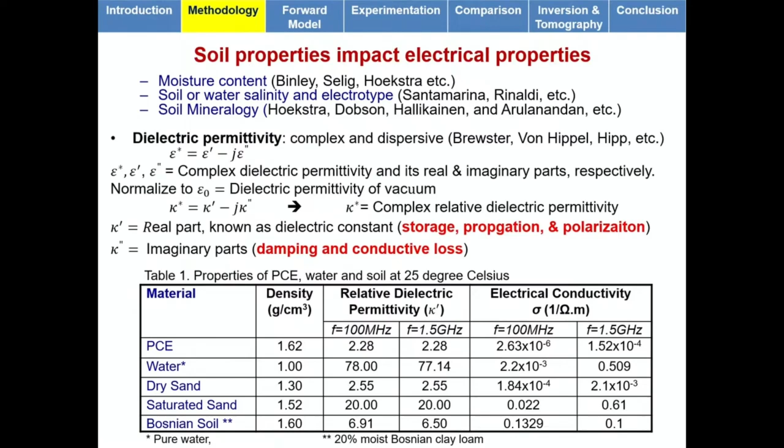And the properties change with frequency. They're not constant. And this variation with frequency is called dispersiveness. So these properties are dispersive, meaning they are a function of frequency. And the way things are done by geophysicists is this way. First, you need a forward model. I don't know if inversion and inverse problems is what you have seen, but forward model means what?

That means that if I have a Gaussian signal or sinusoidal signal or whatever, a known excitation signal source, and I send it to a known medium, if I have a good forward model, I could simulate how the wave would propagate, and I could compute and calculate what the received signal would be. That's called the forward model. So the unknown is the received signal.

And you could simulate this because we're dealing with waves in time domains. You could simulate them in frequency domains. And the input parameters would be the properties of the known medium for this simulation. And obviously, you could experimentally measure that received signal as well. Now, obviously, any model, any simulation, unless it's validated experimentally, is pretty useless and unreliable.

So you need to simulate this. If you're creating this forward model numerical simulation, you need to experimentally measure the received signal and see if they match or not for a known medium. If your simulation matches your experiments, now you've got a forward model that's validated.

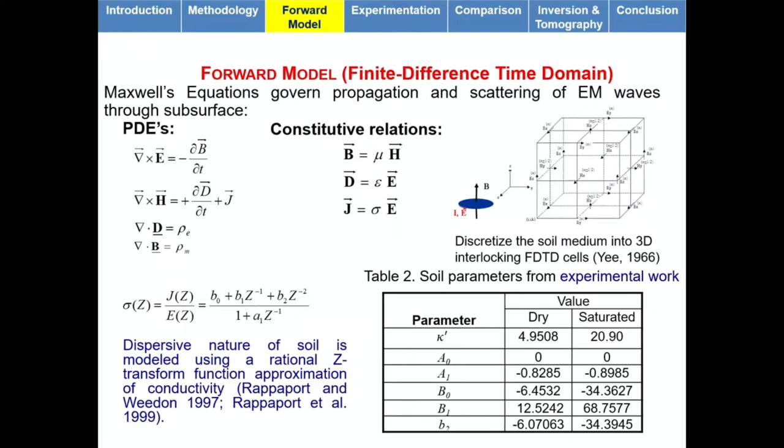The model was created from scratch in Fortran, actually. Surprisingly, electrical engineers love Fortran more than other languages. And then some of the input parameters that you could use, and we validated the experiment that I'll show you later on. This is an example of this.

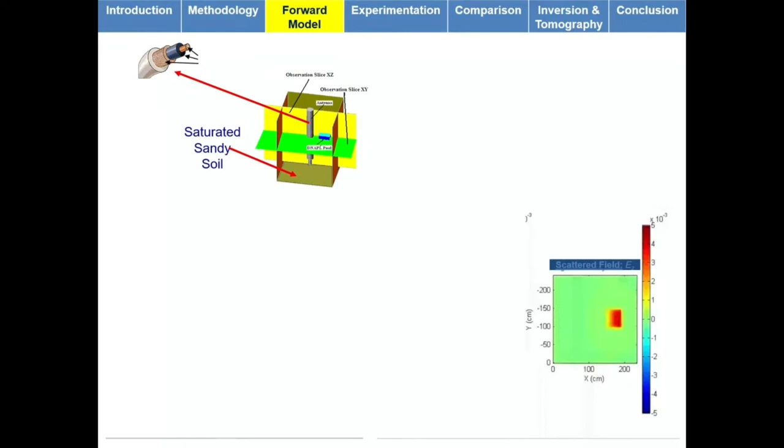If I have the total field, soil and the object, and I have the background or incident field, just the soil, I can mathematically subtract them, simple subtraction. And if I subtract them, we get something called the scattered field, which is the signature of the object. The scattered signature of the object feels like it's propagating from the object. That's the one we're looking for, the scattered field. And if we find that scattered field, we can figure out what we have in that medium.

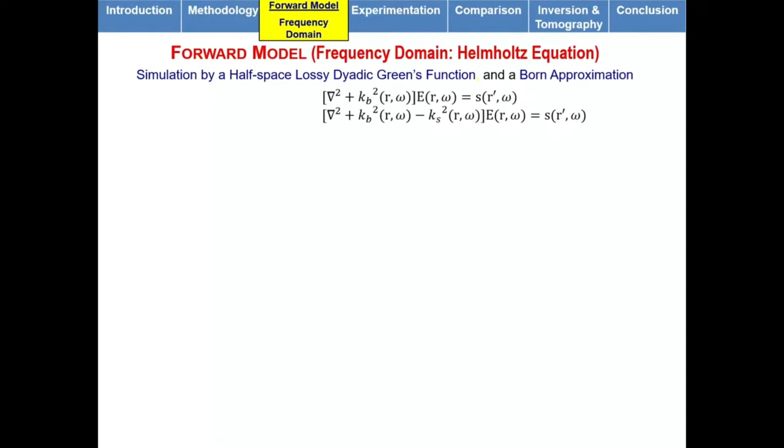This is in frequency domain, where you don't solve the whole suite of Maxwell's equations. You solve Helmholtz equations. And that K that you see is a function of the dielectric permittivity and the frequency. KB is for the background, KS is for the scattered case, and I don't want to get into the details. We use the Green's function with the first or second order Born approximation, solve this, and figure out what the scattered field would look like in frequency domain. Frequency domain looks like a snapshot in time. There is no time propagation, it's just one snapshot. So this is a forward model.

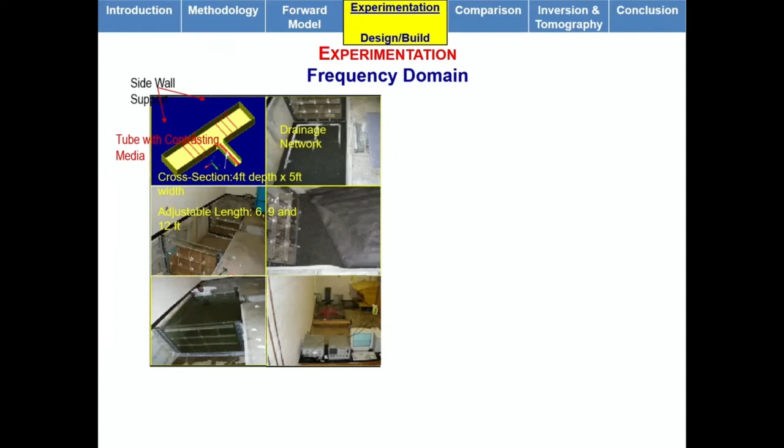And so you have either S21, which is transmission from antenna 1 to antenna 2, or S11, which is reflection at antenna 1. So those are the type of measurements we run, but they're in frequency domain, not in time domain. So there are ways to convert these in time. And the antenna is one that was developed years ago and solves a lot of problems that other monopole antennas have. Can't get into the details of that.

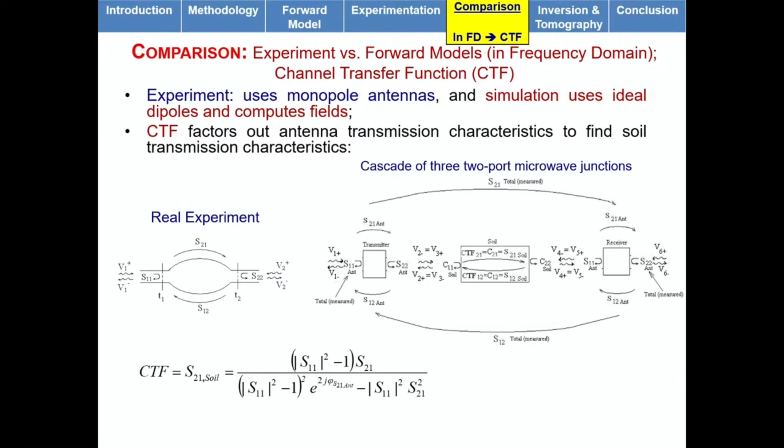If you have interest in undisturbed measurement, what we did is we assumed this was a cascade of two-port junctions. The transmitter antenna, the receiver antenna, and the soil were simulated separately, and we mathematically figured out what the S21 of the soil alone was. We call it the channel transfer function. This was published years ago, but it's a novel way that solves that holy grail. Now we get a measurement that's independent of the sensor. And this method is a black box approach that could be applied to any other measurement. All engineering boils down to physics, physics boils down to mathematics, so if you know mathematics, you know everything. This is a mathematical approach that doesn't have to be limited to this problem.

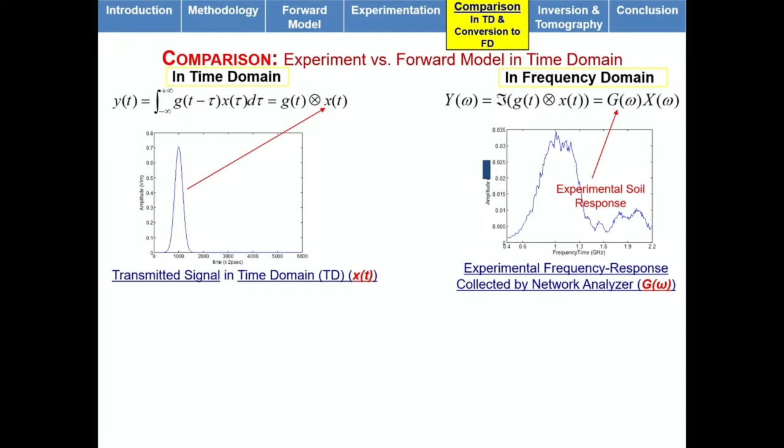In other words, I sent the signal at 1,000, I believe this is picoseconds, and I figured out that the signal would have been received at around 6,000 picoseconds without even running any time domain measurements. Through Fourier, FFT, and IFFT, I can basically bypass the time domain measurement, which is very difficult, and get the time domain measurement mathematically. So all of these things are what geophysicists do day in and day out, I mean, some of that.

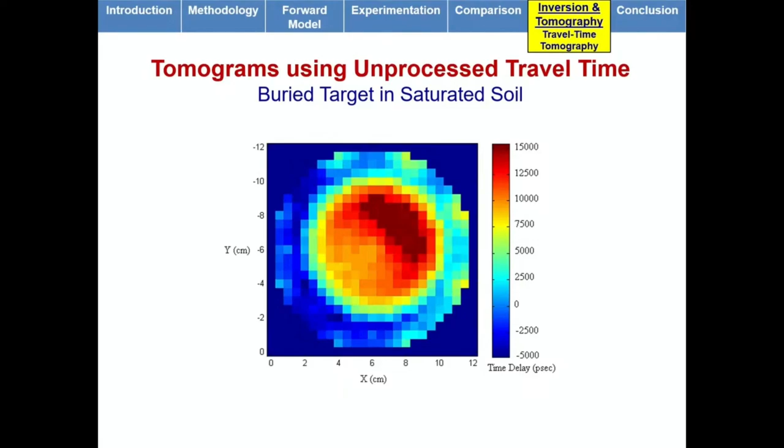And then you could build an image like a tomogram of where the object is, which is that red portion, where the contamination was. Using cross-borehole radar, that could be shown. This is what geophysicists do. They know the electromagnetic waves are impacted by soil, so they look at that scattering and figure out what's in there. Now, what is it that we did?

Years ago, I think it was 2008, I thought that, hey, if electromagnetic waves are scattered by the medium, if I crank up the power a little bit, the medium might be scattered by the electromagnetic waves as well. So let's see what happens. Something could happen to the medium as well. So we tried to crank up the power a little and see what happens. So this is the impact of electromagnetic waves on the medium.

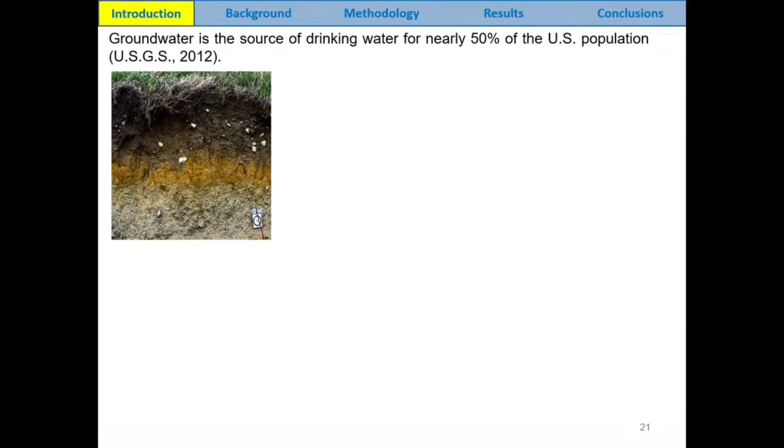And think about remediation. The first example is remediation. This is not the older work. The liquefaction is the newer work ongoing, so I cannot reveal all of the results, but this I can. So a lot of groundwater in the United States is contaminated with different things, especially DNAPL or PFAS and a lot of other things. Marina knows what I'm talking about if you're into geoenvironmental engineering.

And to remediate those, to clean up, there are different ways. Ex situ methods, like you dig the soil, send it to a plant, you burn it, you clean it, wash it. Or in situ methods, like air sparging. I'll show you an air sparging method later on. You try to inject air or some chemicals in there and clean it up. People use electric, and these ex situ methods are costly. To dig the soil out and clean it up, it's very costly.

And there's also natural remediation, like volatilization. Your contaminants have a component that quickly evaporates if it's exposed to air. Those are called volatile organic compounds. And they vaporize if they're exposed to air. And there are microbes in soil that can biodegrade, can break down your contaminants as well. That's called biodegradation. These are all slow. If we could stimulate them, we could clean up the soil, not in 1,000 years or 100 years, but in a year or so.

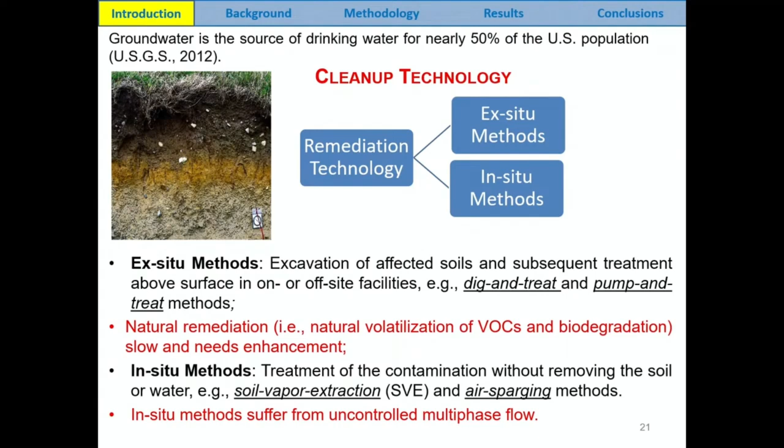And air sparging is one method. People pump air into the soil and basically vaporize the contaminants, the VOC part, and then the rest, they can inject microbes in there or food for microbes and hope that the microbes would break down contaminants. That's called bioremediation. We'll talk about air sparging later on. A lot of these methods are used, but to stimulate them, people use DC current, direct current. And the whole field of electrokinetics comes from that.

And people have tried to use AC currents, alternating currents, like the one we have in these outlets, for remediation as well. The problem with AC and DC is they generate a lot of heat. The other problem with DC is it alters the pH of the medium. Both are bad for the very microbes you're trying to stimulate for biodegradation. So we thought this is an issue. Let's come up with a better way. With electric current, you just have the resistivity of the medium. You put a voltage, you get a current, no more control, period.

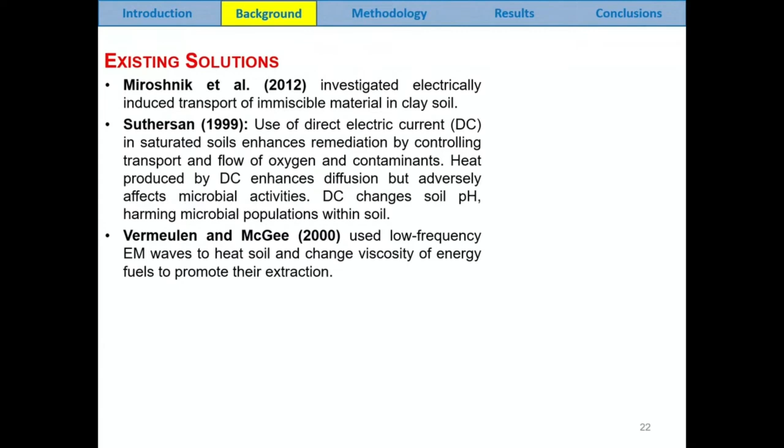What time did we start?

When we have an electric field that's constant, meaning positive here, negative there, anything that is charged would orient itself. If it's a negative ion, it would go to the positive pole, and the positive would go to the negative. If you have a molecule that's a dipole, like water, it would tilt, and the negative would face one way and positive would face the other way. Because if you remember, some materials are charged, like ions, either positive or negative. Some molecules are neutral. They're uncharged, there's no charge.

But even among the neutral materials, you have molecules like methane, CH4, where the positives and negatives are canceling each other, but they're uniformly distributed around. So they're not only neutral, they're non-polar. They don't have a pole.

But if you look at the water molecule, it's neutral: 2 positive hydrogens and oxygen with 2 negatives. It's neutral, but the positives are on one end, negatives are on the other end, which means it's a dipole. It has 2 poles. If I put water in an electric field, it would orient itself.

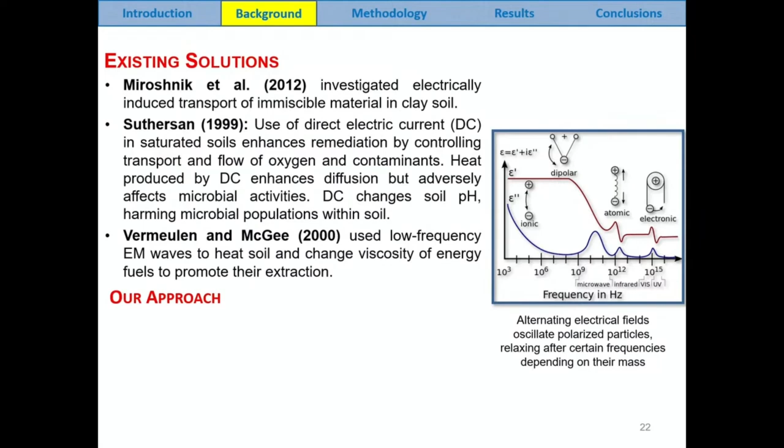And then you go higher and water is not absorbing energy anymore. You go even higher, atoms will stop oscillating. You go even higher, electrons will stop oscillating. You go to X-ray, nothing oscillates, nothing absorbs energy, which is why X-ray goes through your body, but microwave or visible light doesn't. So that's why you take an X-ray.

So there are different relaxation mechanisms. And if I pick the right frequency, I can decide what I want to oscillate and what I don't, and how much energy would be absorbed. And I could control things so that things don't heat up, but I can move them. And when I thought of this, I thought, okay, the least I could do is stimulate diffusion of material. If I have a chemical that's trapped, I can move it. I can help the same natural process speed up.

That's what I hope. Then we realized that we opened a can of worms, but we found so many other things that happen in there, and I'll show you a couple of them. So all these experiments were done in the lab, so we had to do it within a cavity, meaning we had to trap everything within a box, so it wouldn't impact your body.

There's no danger from electromagnetic waves at these frequencies anyways. At low frequency, somebody says your cell phone gives you cancer, but they don't know what they're talking about. So yes, your cell phone can heat up your brain, but the battery cooks it more than the waves do anyways. Not at these frequencies and powers.

Electromagnetic waves are non-ionizing waves at low frequencies and these powers. Hence, there's no danger of ionization or cancer and so on. Yes, with X-ray and gamma rays, we're talking about cancer because of that high frequency. Electrons are released and photons are released and so on.

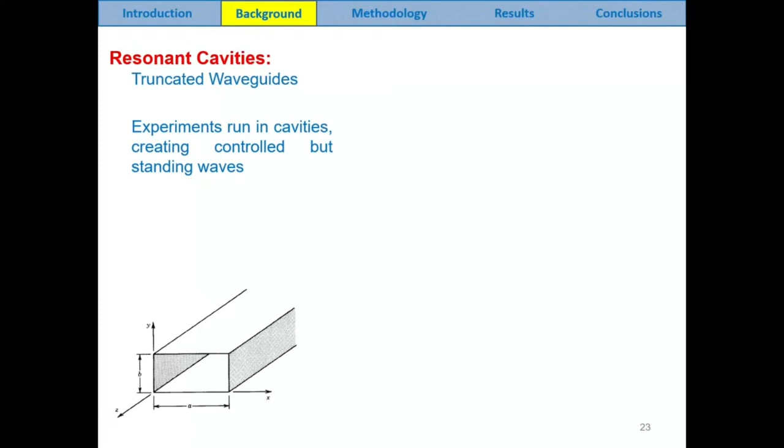But we did it within a cavity, and in cavities, the only difference is now you don't have traveling wave patterns. You have standing wave patterns. And you could create different wave patterns depending on the frequency and the wavelength of that sinusoid with respect to the size of that box. You could create first mode, second mode, third mode. Think of it as modes of vibration of a building.

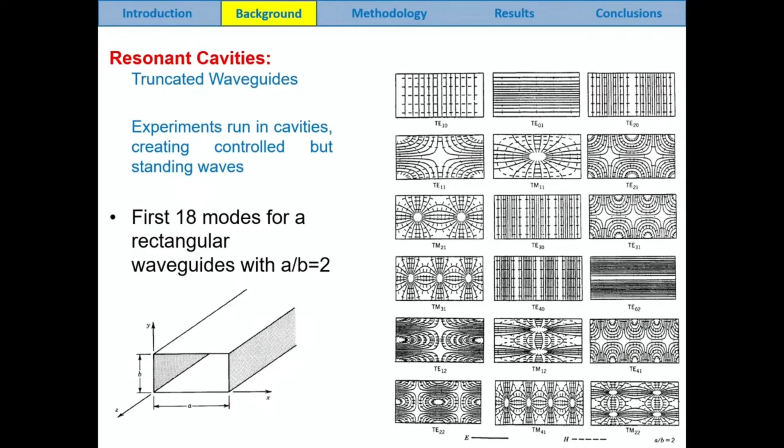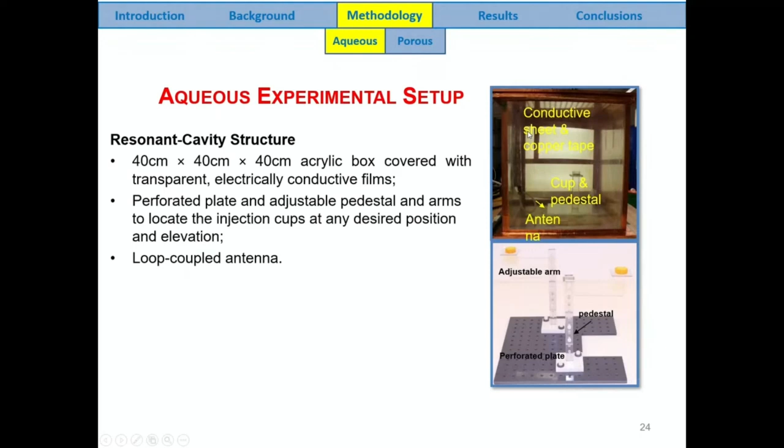So we created this box. It's made of plexiglass, but the faces are covered with a transparent, electrically conductive metal film that you see through. So this is a cavity, and up left there's a little loop antenna that magnetically excites the medium. And we thought, okay, we put a little cup at the center, right here, and we will inject chemicals in there that simulate DNAPL to see what happens. We hoped that it would diffuse faster.

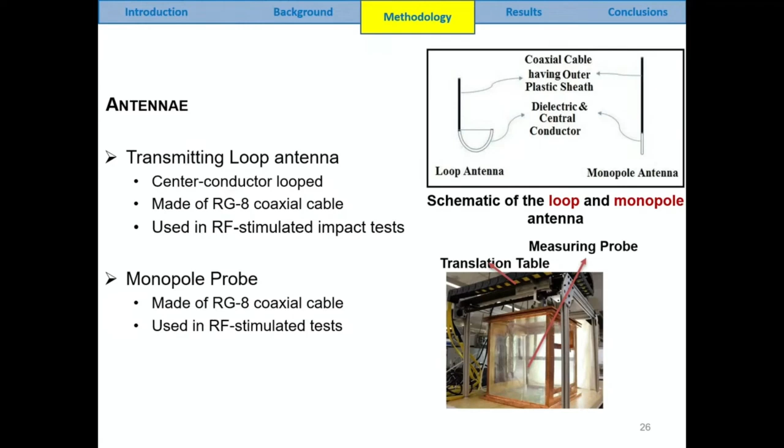And this is the loop antenna we have, to excite the medium on the left, and the monopole antenna is just to probe the medium and see what the field looks like. So later on, we figured out the process, which was, by the way, coined dielectrophoresis.

And that's the formula. As long as there's a difference between epsilon as the background, epsilon m, and epsilon as the object, particle p, there's a force applied. And that force is proportional to the gradient of E.

Is the electric field higher here or lower here? In other words, when things start oscillating, the stuff that would oscillate, like water, would oscillate. The stuff that doesn't oscillate gets out of the way. That's why you create a flow, a multi-phase flow. That water would go somewhere, and the contaminant that's neutral, non-polar, like methane in that case, or DNAPL, would go elsewhere. So we figured out that this was the mechanism.

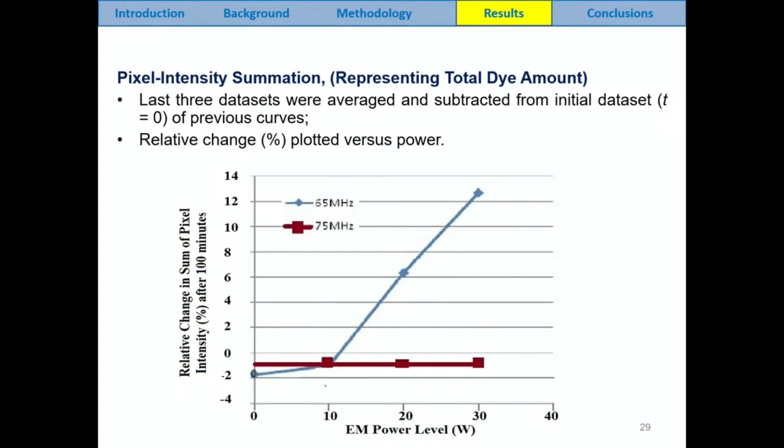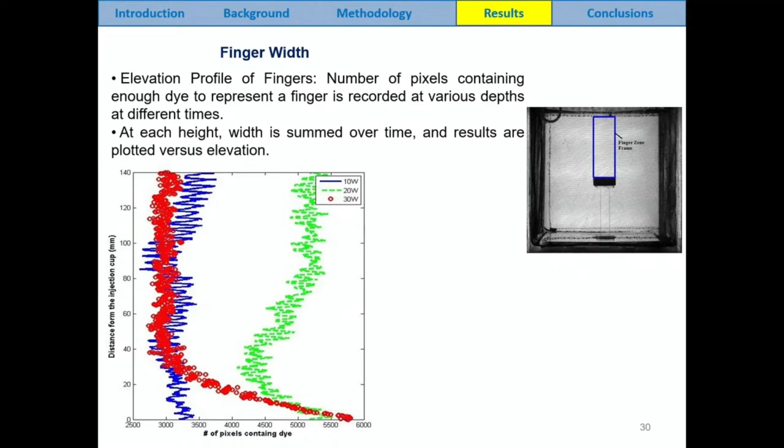We also looked at the width of the finger that comes out of that. We talked today with Achilles about the finger formation - we could control finger formation, which is a good thing in manufacturing, a horrible thing in oil exploration, or MICP, or probably colloidal silica type remediation. When you try to inject things, sometimes you like fingering, sometimes you don't. So we could control it using electromagnetic waves.

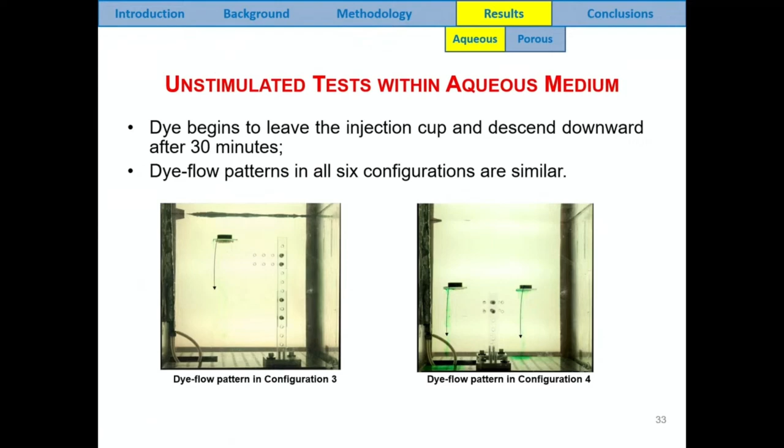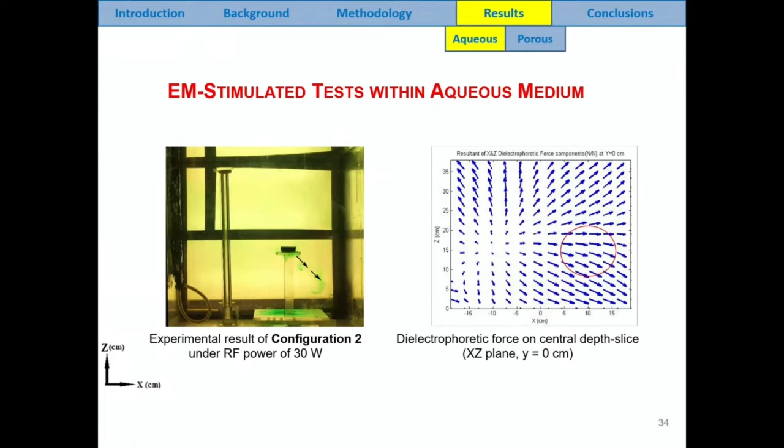We put the cup in different locations, and you see these two cups. When there's no electromagnetic waves, the contaminant sinks down. If there's an electromagnetic wave here, it will move around. Those arrows are the force field. Wherever the force is, the dye goes. In two other cups, the dye goes up. In fact, we can change the frequency and make the dye dance in there and change direction wherever we want. This was proven in the lab. This works, not an issue.

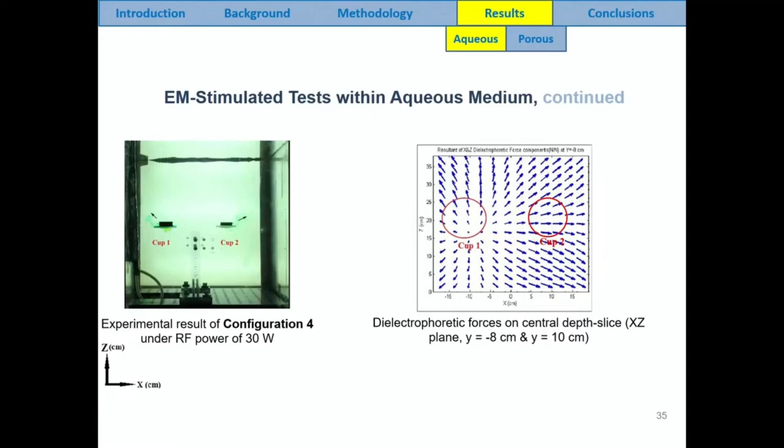Now this is another one. Let me quickly go through that, and hopefully I get to the stuff that you like.

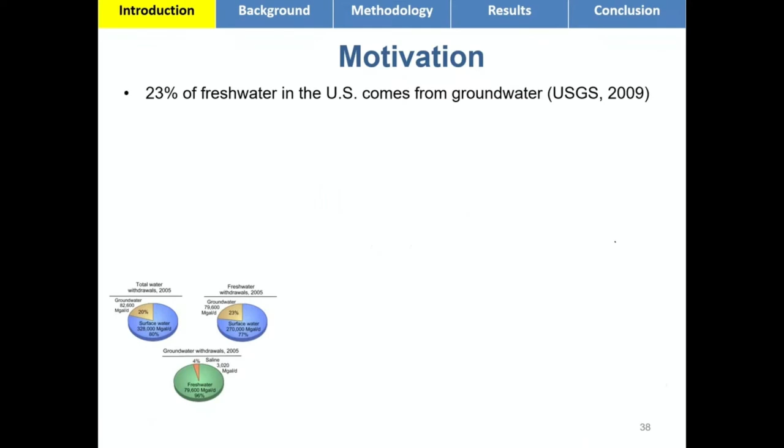This is an air sparging problem issue. As I told you, when you have contaminated soil with VOCs and groundwater, people inject air into the soil hoping that the contaminants would clean up and evaporate.

If I give you an analogy: if you have an empty cup and put a straw in and blow, it's easy. But if I have water and blow in there, I can't push the air in - I have to push and push. If the pressure is too high, bubbles form and come to the surface. I have no control. The same thing happens in soil.

Channels form, and cleanup happens only around channels. We call them mass transfer zones. Nowhere else. What does the industry do?

They realize this is an issue. They advertised air sparging, but it wasn't working. So what they do is run it for a month, shut it off for 6 months, hope they come back, turn it on again, and channels form elsewhere. It helps a little, but not a lot, because you've already moved soil particles and created preferential paths.

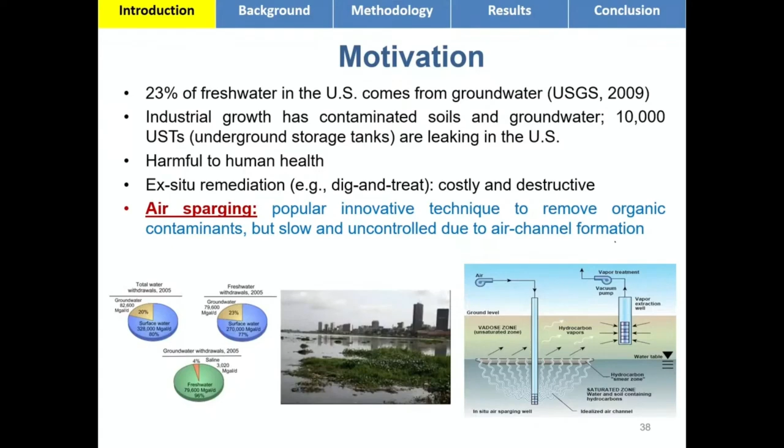So we thought: okay, we can move a contaminant that's neutral and nonpolar, maybe we can move air too. Why not? So we ran an experiment very similar to that - I don't want to get into the details - but first we tried to figure out how air sparging works.

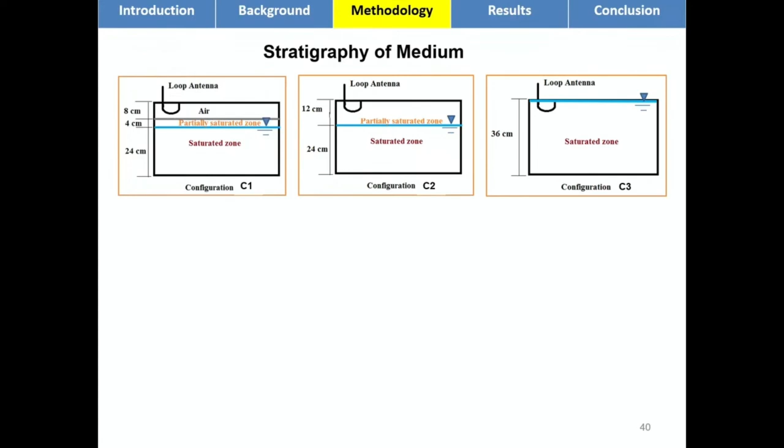We created several setups: fully saturated, halfway saturated, with a little bit of dry soil on top, and with no dry soil on top. These are configurations 1, 2, and 3 that we created. For these configurations we ran a series of experiments. This is again another cavity, with the loop antenna on the left.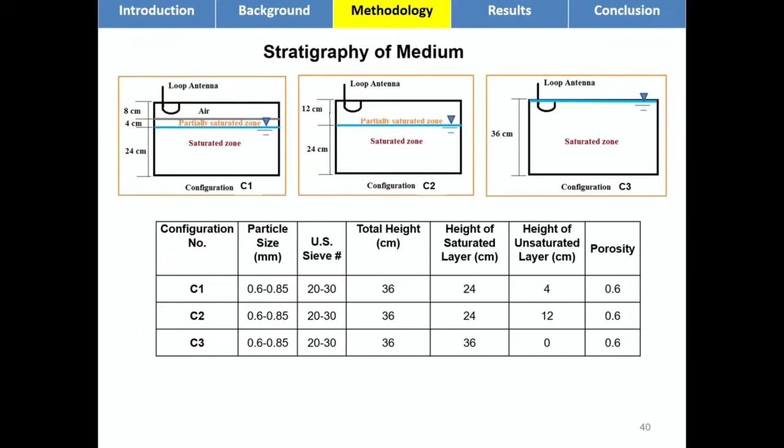The air pump is at the center - we pump air at the center. First we try to see what air pressure does. One thing we realized is when you pump the air in there... let me show you an image that hopefully clarifies things. No, I don't have that image yet.

So when you pump the air in there, it's going up, going outward as there's more of it. If you look at the top view, there's a circle - the radius of that circle is called the radius of influence. We thought we might be able to control this radius of influence. This is the zone of influence, and the radius is the radius of influence.

First we wanted to see what air does, what the industry does, because the industry just pumped it and didn't know exactly what happened. So we started the experiment, cranked up the pressure to a certain point, and then air sparging starts. That pressure I'll call the initiation pressure.

We wanted to see if that initiation pressure, high or low, would have an impact. After air sparging was running for a while, we would increase the pressure more and more to see if further pressure increase would change the zone of influence. Short story: we realized the initial pressure decides what the zone of influence is, how large it is. After the zones are formed, you could increase the pressure forever and not change it much, unless you move all the soil around with your pressure.

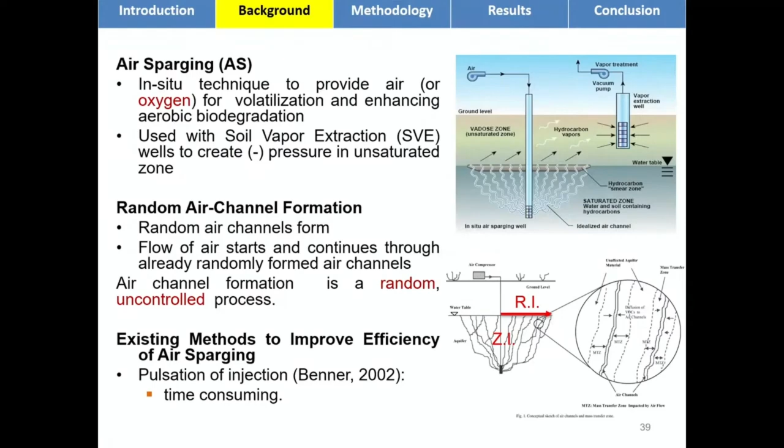So these are the experiments, testing the impact of initial pressure, and then we ran testing to study the impact of further increase in pressure. We did the same thing with electromagnetic waves. We applied electromagnetic waves before the system was turned on to see how it impacts it.

And we applied more electromagnetic waves after the air sparging was running to see if there's any impact. To tell you the truth, the ones on the left have an impact. The ones on the right, waves, pressure, doesn't matter. Channels are formed, channels are formed. Good luck, you can't change them.

In this figure, I have the radius of influence on the vertical axis, and the initial injection pressure on the horizontal axis. Configurations 1 and 2 are like that. The higher the initial injection pressure, the larger the radius of influence, but obviously at some point it fluctuates.

Configuration 2, which has some dry soil on top compared to configuration 1, confines the soil, so the zone expands. That's why the blue line stays above the red line.

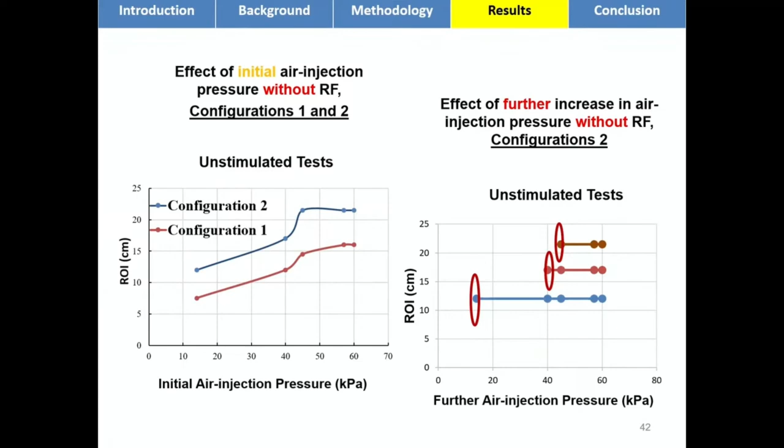Further increase in the pressure on the horizontal axis is the further pressure increase after the system started. The vertical axis is ROI — no change. No further increase in pressure increases the ROI.

Now we applied the same thing with electromagnetic waves, and these are the forward models, these are the force fields. Look at this, this is the top view of the field. And look at what happens later on in the image.

The image on the left is no electromagnetic wave. You see the top is the pipe, you get the air, and the circle — you have a pretty uniform shape. That's half of the zone of influence, that's the radius of influence.

And on the right, I applied electromagnetic waves. Look at the shape of this zone of influence — it's deformed. Why did it deform? For that electric field, this is the dielectrophoretic force field. Look at the arrows — they push down and then stretch out.

Basically, that circle should turn into lips — a pair of lips like human lips. And you see that here.

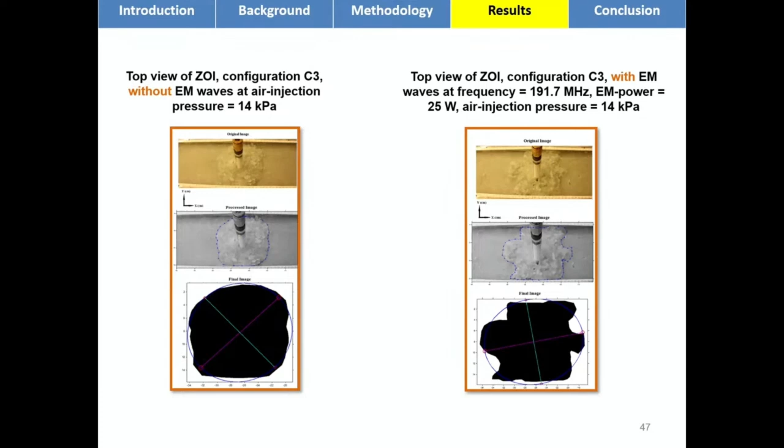So we could design a field that changes the shape of the zone of influence, whatever way we want. Then we said, let's try different initial electromagnetic power to see if we could expand this zone of influence, like air did. And this is it: more initial electromagnetic field power before the system is turned on creates a larger zone of influence.

Then we said, hey, two different things happen — in 10 minutes two different things happen, and we don't know whether other things are happening. So we said let's look at the hydraulic conductivity. If we're impacting the contaminant, if we're impacting the air, we might be impacting the water. We thought dielectrophoretic forces are working on the water too, so they should move in the opposite direction, and we thought let's measure the hydraulic conductivity and see what happens.

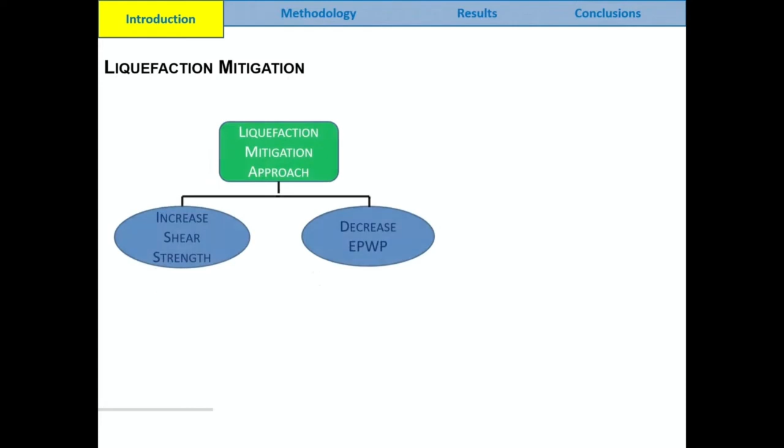So here, this is just an explanation of liquefaction. As you know, when you have an earthquake, excess water pressure goes up, and soil particles lose touch — liquefaction happens, soil loses its shear strength. So the way people mitigate liquefaction is by either increasing the shear strength, through compaction, dynamic compaction, or other methods.

Or there are ways like IPS, induced partial saturation. People pump in air, the same air sparging method, to make the saturated soil unsaturated. And 5% unsaturation, 5% air content, could mitigate liquefaction potential by 20-25%. The research shows that.

So basically, IPS tries to decrease the pore water pressure increase caused by an earthquake. What we thought was — and later I'll show you that we realized — the electromagnetic waves increase the hydraulic conductivity of granular soil like sand or silt or gravel, but decrease hydraulic conductivity of clay. We thought, if we increase hydraulic conductivity in sand or silt, the excess pore water pressure would dissipate out faster, and we could mitigate liquefaction.

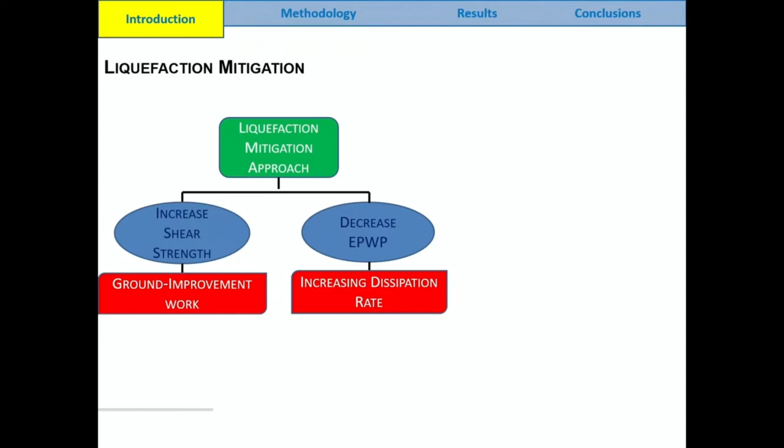So that's the big picture of that research. What we did is we said let's figure out what happens to hydraulic conductivity first, and we ran some experiments — I'll show you the setup. We wanted to look at hydraulic conductivity change with electromagnetic waves, and we wanted to look at the pore water pressure change due to seismic shaking when electromagnetic waves exist there. This is the two laboratory tests, Series 1 and Series 2, that I'll show you briefly.

We tried it on glass beads — because it was cleaner, we could take images — and we tried it on natural sand as well. Again, we created a cavity, that cubic box that you see.

We put a permeameter, the same ASTM standard rigid wall permeameter, in there. We put a monopole antenna in there, and we measured hydraulic conductivity, and then we turned on electromagnetic wave excitation in there, and at different power levels and frequencies, we looked at hydraulic conductivity to see what happened. So that was basically what we did in Series 1. We tried different frequencies from a couple of hundred megahertz to 700 megahertz and so on.

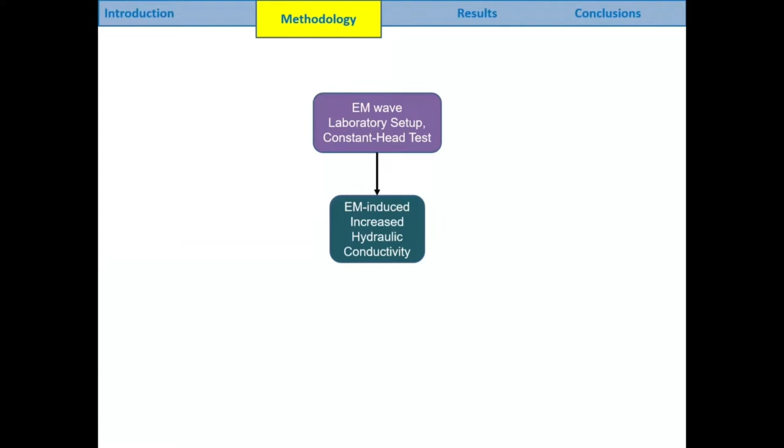And so basically, these are different tests: electromagnetic waves for hydraulic conductivity, constant head test, and falling head test for sand and clay. And then we looked at the excess pore water. Then we shook the device, and I'll show you some images, to see whether we could mitigate liquefaction or not. Obviously, we had a shaking table that we would shake things on.

So Series 1, we put a permeameter in a cavity, we apply electromagnetic waves, we look at hydraulic conductivity. Series 2, we put in a device that could shake the soil, create simple shear, hopefully, and then measure excess pore water pressure rise, with or without electromagnetic waves as a control. So that's the whole theme of this.

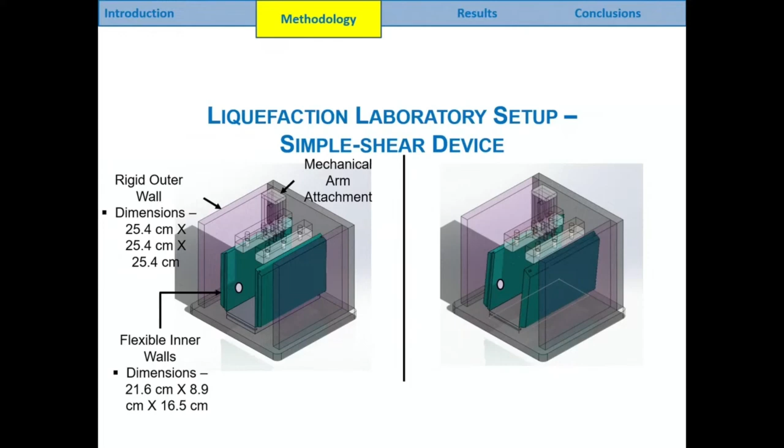And this is the setup. There's a cavity outside, the same plexiglass covered with films. The two walls inside are flexible. The top is connected to an arm. The box sits on a shaking table and shakes within the cavity. With the pore pressure transducer on the side, I can measure the rise of pore pressure as things are shaking. So this is the experimental setup we have. And again, we tried it at different electromagnetic powers.

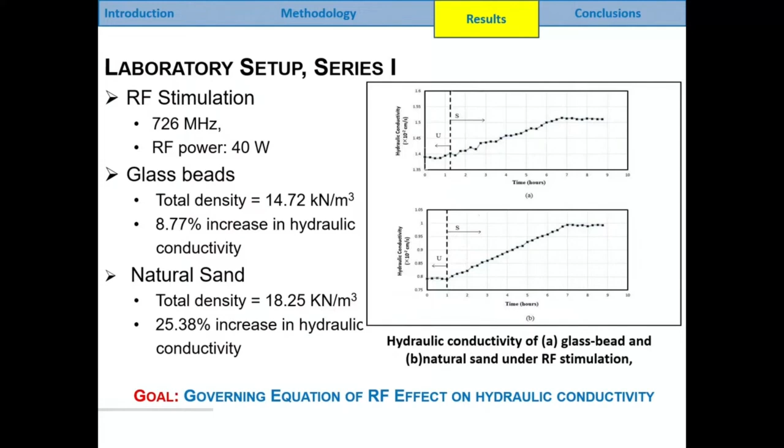And we thought the only thing that could be happening is somehow the electromagnetic waves are changing the viscosity of the water. Basically, in water the positives of one molecule are attracted to the negatives of the other molecule randomly. When you apply electromagnetic waves, you reorient them with the field. We're still trying to understand this. Maybe we're reducing viscosity, that's why we're increasing hydraulic conductivity. And not only the peak relates to electromagnetic power, the slope relates to electromagnetic power as well.

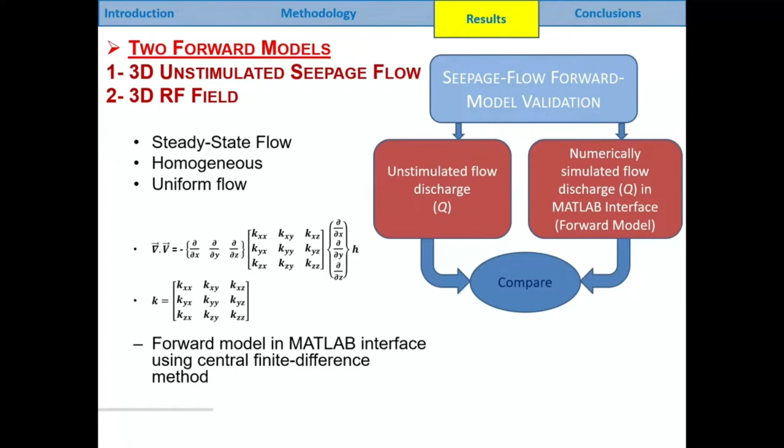And obviously, again, like before, the constant head test is a uniform flow. So that's why that simple formula exists: you know what the discharge is, you measure it, you know what the hydraulic conductivity is. When you have a field that's non-uniform, then your hydraulic conductivity would be non-uniform. So we have a forward model for electric field, created in COMSOL, and we assume that the full tensor of K turns into K prime. And that K prime, I'll show you the formula, is different. So we created a forward model for seepage. We validated it in the lab. We know it works with no electromagnetic waves.

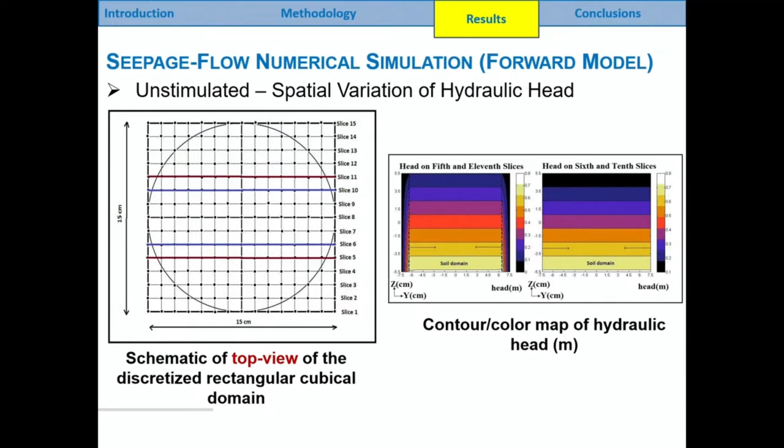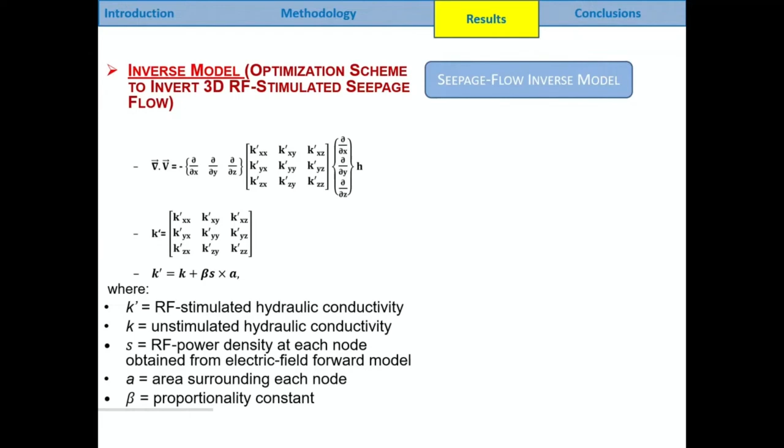And this is basically the hydraulic head pattern within the soil using our model. And this is when you have electromagnetic waves. We assumed the relation between K prime, electromagnetically stimulated hydraulic conductivity, and K was this. And then we calculated K prime with a beta that we didn't know, it was just an assumption. We simulated the flow, compared the discharge to the experiment, ran that optimization, minimized that cost function, and figured out what that formula was. So we developed the governing equation of how hydraulic conductivity changes with electromagnetic power.

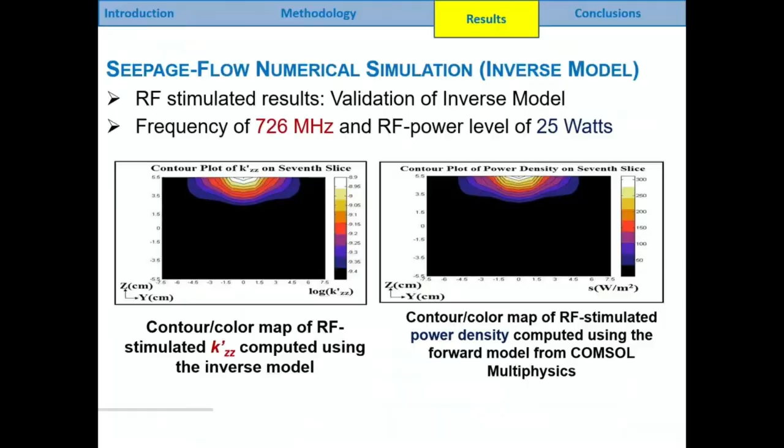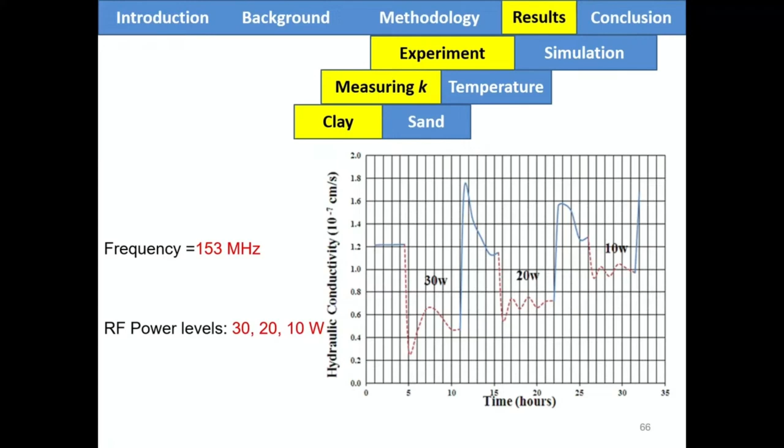I think my time is almost up.

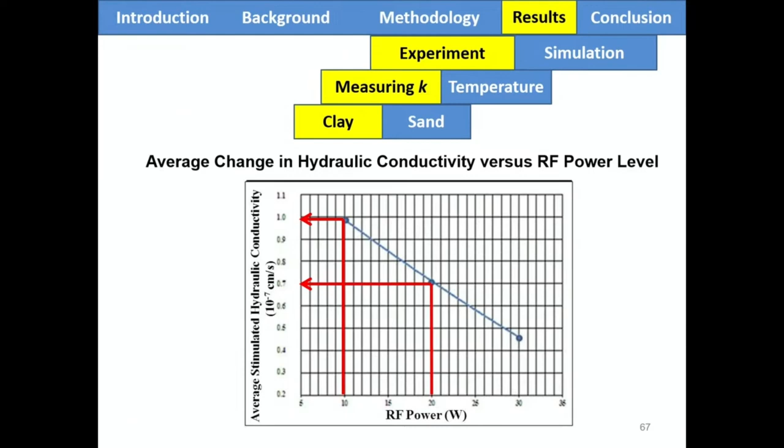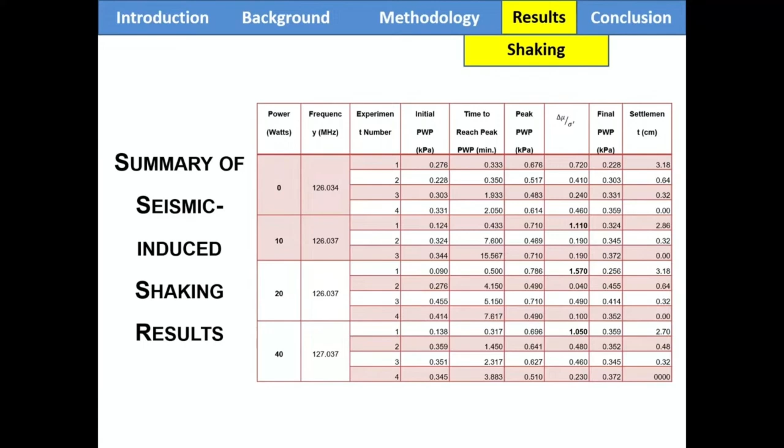And this is the pressure that we study. Again, I have to skip these, but it shows with different shaking and different power how we control that. The problem is the integration, but we have to modify the setup, because with the setup we have the pressure dissipating out, but no way of shaking, so we couldn't mitigate the contraction to the level we want. But we're still trying to understand. As I said, we have a patent pending, so I can't discuss this too much. And this is pretty much all I had.

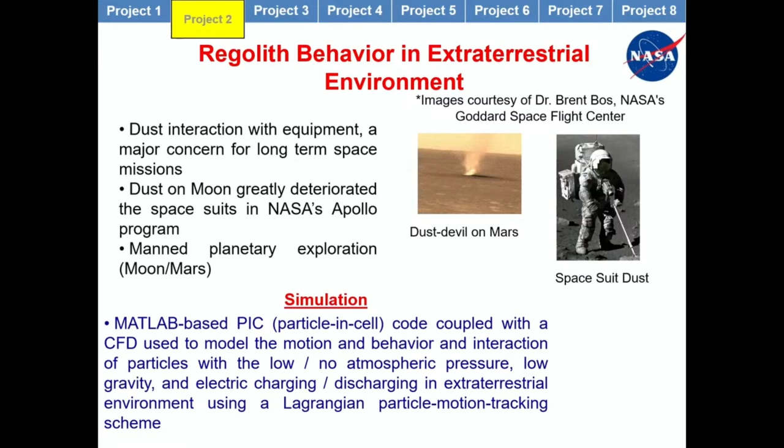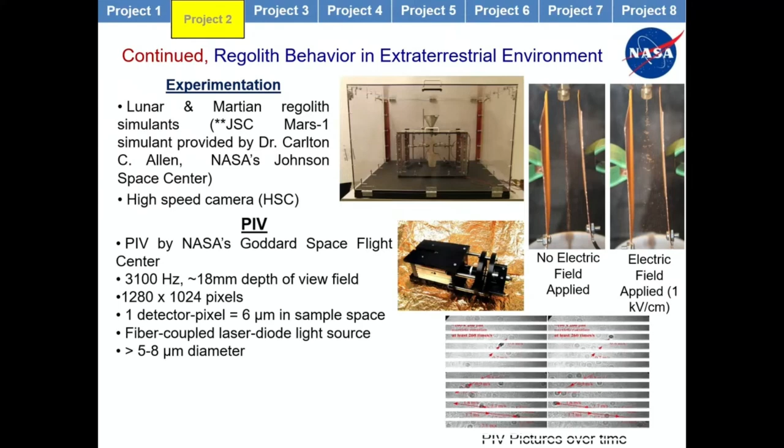Here are some other studies we have for the soil particles on Mars, because they're charged and they cover all the astronaut suits and solar panels. So we try to study how the charged soil particles behave in vacuum on Mars and the Moon. That's a NASA project. The previous ones are all NSF projects.

And in other projects, we developed sensors that would mix the regular measurements by geophysicists or other sensors, but sometimes the contamination level is so low that physically you cannot detect it. But we mixed it with the pattern of the design, so that dielectrophoretic forces push all the contaminants to one side. So you artificially raise the concentration and detect it. This was for medical purposes that we tried to develop this. And for water quality purposes, this works.

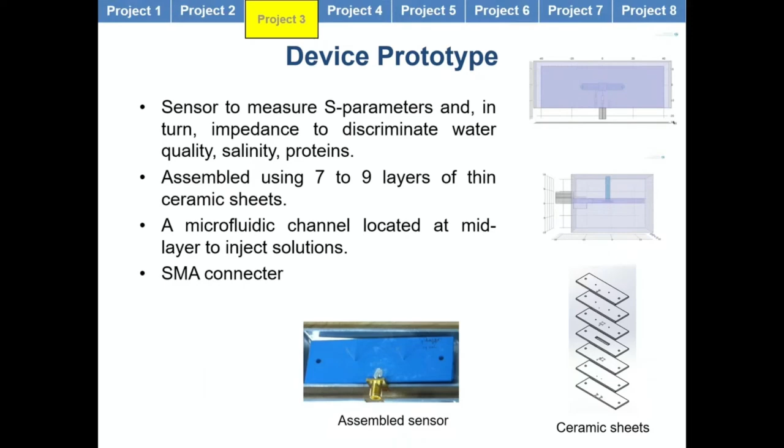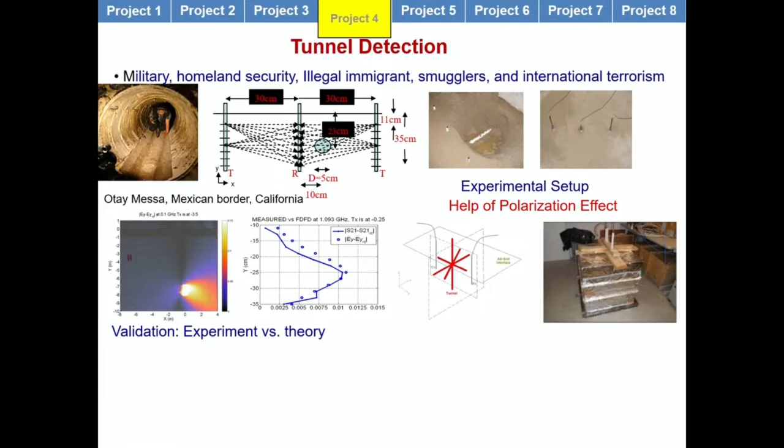These are all results. Tunnel detection across the Mexican border. We use geophysics for that purpose. And we try to detect moving humans in there and so on and so forth. I don't want to get into the details of that. This is another project for the Army.

If I told you more, I would have to kill you, and I'm kidding.

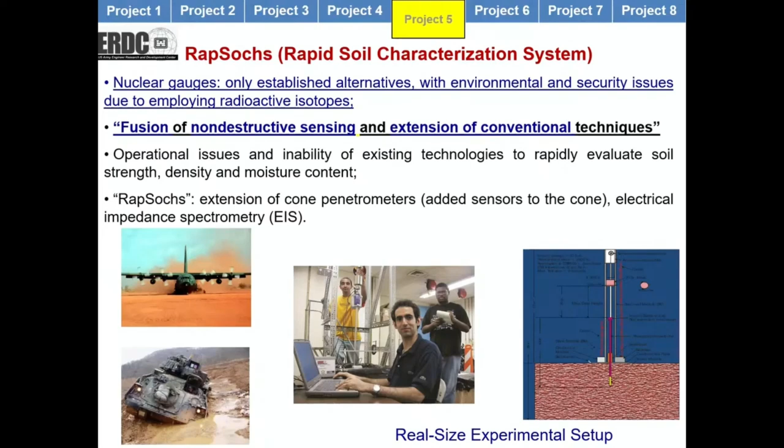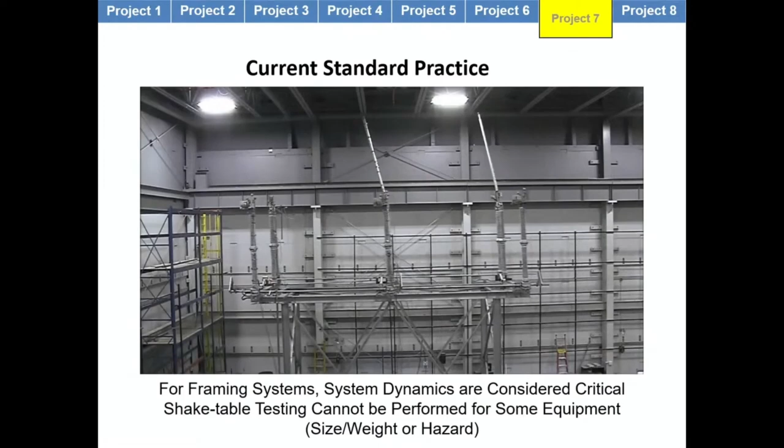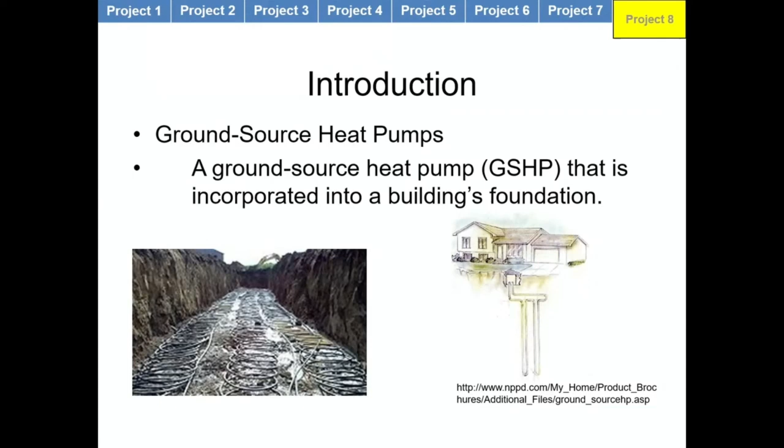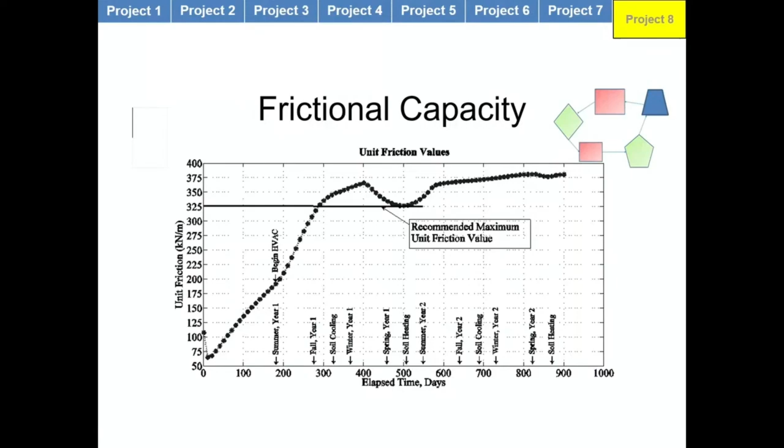this is energy geotechnics, trying to use soil as a source or sink of heat to store energy, with simulation and experiments and so on and so forth. I don't want to get into the details of that. And by the way, we realized that if you drive piles in clay, obviously there's a pile setup phenomenon. You have to wait 1,000 days for the capacity to build up. If you turn on your HVAC system that's connected to the piles, because you put the circulation into the piles to use the ground as a source or sink of heat, then the capacity drops. So you have to be careful with that. So the impact of energy piles was another thing.